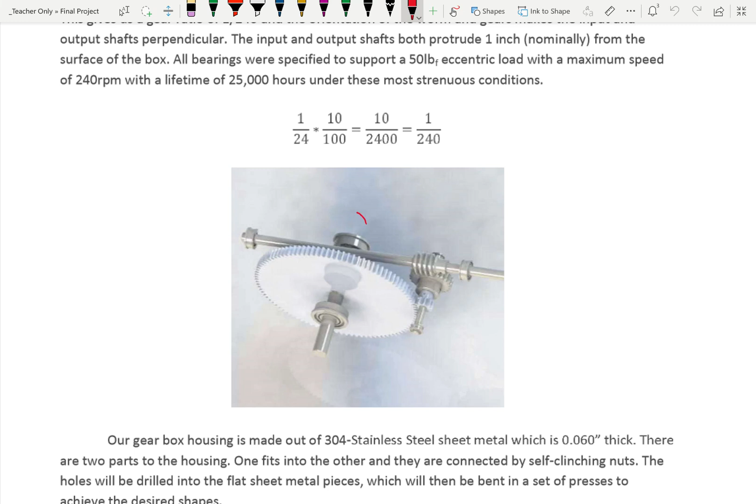To bring fast food in, Alfred State actually brought in Pizza Hut, Taco Bell, basically Kentucky Fried Chicken - that was the fast food joints. People from town would drive on campus to go to the fast food. Did you hear about one of the kids up here, might have been SUNY Canton - one of the 4 colleges up here - they booked plane tickets to New York City to get Chick-fil-A and flew back the same day because it was cheaper than driving. They had enough people, like 6 or 7 people putting in money, so it was like $20 a person for the plane ticket for one person to get it all, then they flew back. Unbelievable - 3 hours.

Okay, so we're going to take a look at this design project that Boston University did, or these 4 students at Boston University did, and we're going to redo it and verify their numbers.

What I'm really interested in that we finish between now and finals week is the shaft that I just circled there, okay? So we got the 1 gear, and we got bearing support, and then we gotta make some choices, because I'm not sure they did, but in this area right here should be probably a retaining ring, and then we gotta figure out the bearing at the other end.

So when we get done, we really got a shaft looking like this, with a bearing here, bearing there, and a gear like so. And then this little shaft out here, it's got its mating pinion, so we'll design that along with this. And that'll give us the gear design bit, the shaft design bit.

We'll be able to pick our tolerances. We can deal with keyways, and we can deal with rings. So it should be a culmination of pretty much everything we've done and make the world a happy place. Make sense? Okay, Laura, you good?

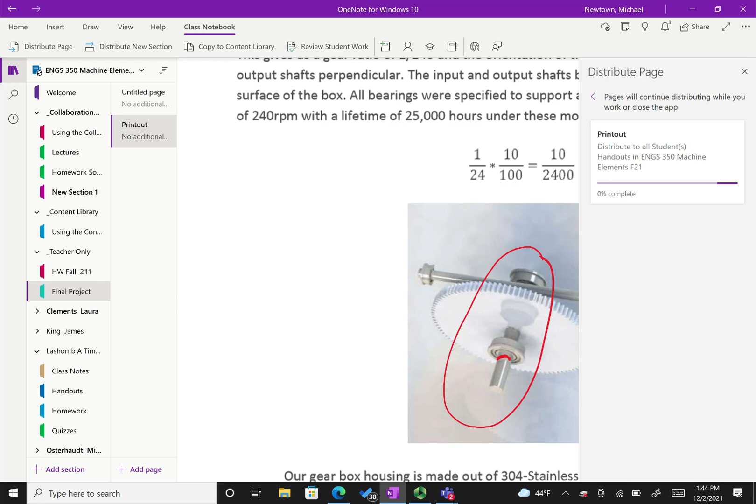Cool. Makes sense? So really it's not any more real teaching, it's more about picking this thing apart and trying to figure out what the sizes are supposed to be, and you guys calculating some numbers to go with it. So let's delve into it.

So our four friends here designed this. We got a gearbox that's required to have a ratio of 1 to 240, a minimum life of 2,500 hours or 25,000 hours. The input and output shafts are orthogonal and a maximum of 1.5 inches past the outer surface of the gearbox. The output shaft and its bearings must support an eccentrically loaded 50 pounds and have a maximum input shaft rotation of 240 RPMs. All right, so we got our RPMs now, right?

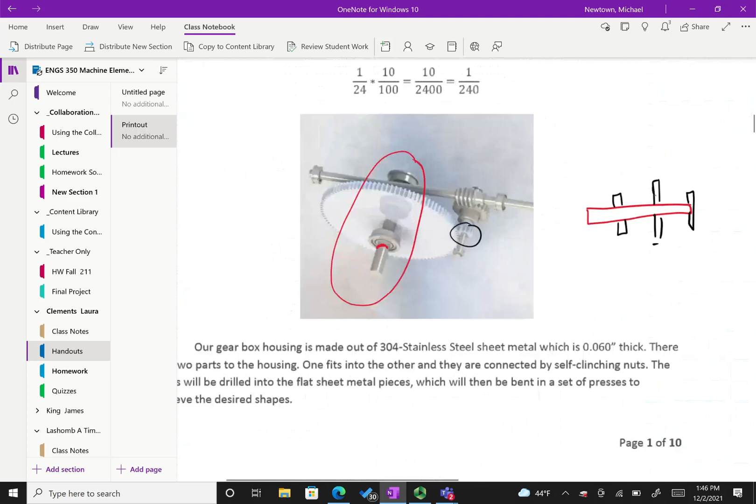Eight-sided? Maybe six-sided. It's hard to tell on the paper picture, and it's not even that much clearer on here. Looks pretty hard to tell if it's orthogonal. I think it is. If you look at the end, it does look like there's a little bit of a right angle, or X or something. It would make sense, because every shaft when it drives has to probably have some teeth, like a drive system so that there's a coupling that slides over, but that's the only thing I can think that means. It sure hell doesn't mean that it's an orthogonal view.

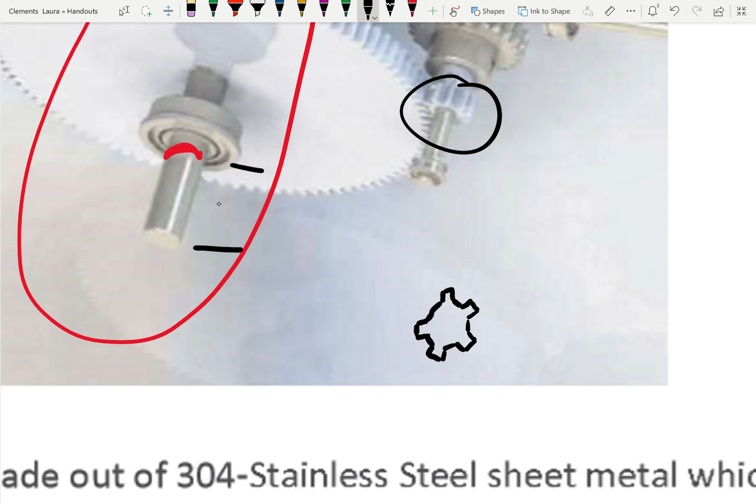And a maximum 1.5 inches past the outer surface. So our bearings out here, from here to here, have a max length there, okay?

Final design of the project includes a 10-tooth spur gear and a 100-tooth spur gear, one worm gear, and one 24-tooth worm gear. We're not going to worry about the worm gear, but we are going to go work on that little pinion gear out there. Gives us a ratio of 1 to 240.

The orientation of the worm gear makes the input and the output shaft perpendicular. The input and output shafts both protrude 1 inch from the surface of the box. So this is the input shaft here, the way I'm reading this. Everybody agree?

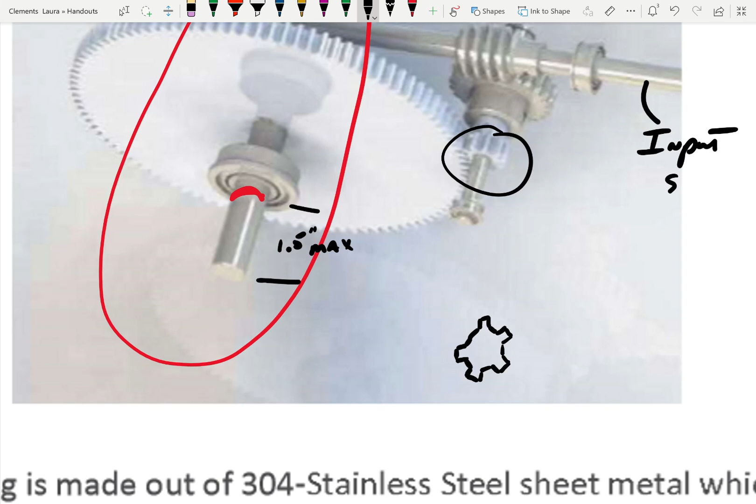Yeah, okay, and that's going to drive down here and then drive this and drive our output. And if I get a chance, I'll talk about shaft couplings so that you can see what those look like.

The input and output shaft, 1 inch, you don't have to worry about that. All bearings are supported, and all bearings are specified to support 50 pounds eccentric loading with a maximum speed of 240 RPMs and a certain lifetime. So we'll actually go look up some bearings too while we're doing this one and choose some things. Our gearbox is made out of 304 stainless steel sheet metal.

Cool. 2 parts, 1 part. We might modify that a little bit to make something a little bit more plausible.

Hey, that reminded me, did Tim log in today? No. Can you ping him, Mike, and see if he's out there on the planet?

All right, so here's the equations they did. We're going to check them with ours. And there's the spreadsheet that they did for the input shafts, so we'll run and check their numbers. Basically, we're going to redo their design as much as possible and check their numbers and make sure it works. Or actually, I should rephrase this: you guys are going to check their numbers, and I'm going to guide you along. All right, so cool.

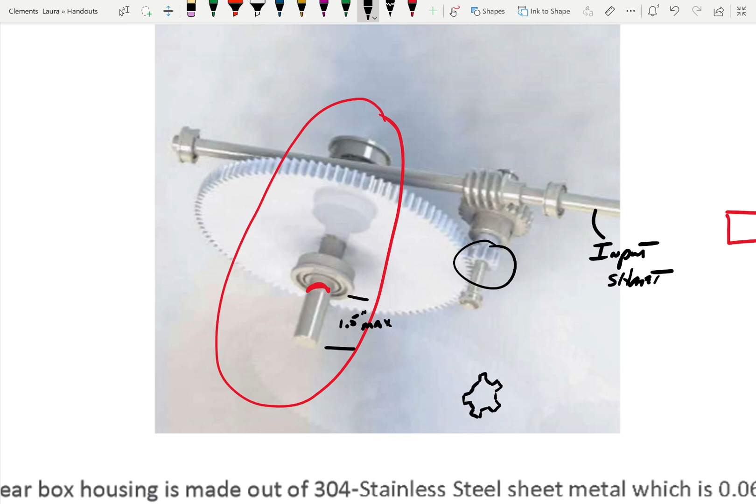So let's ask the $100,000 obvious question out of nowhere. What's the first thing we want to know?

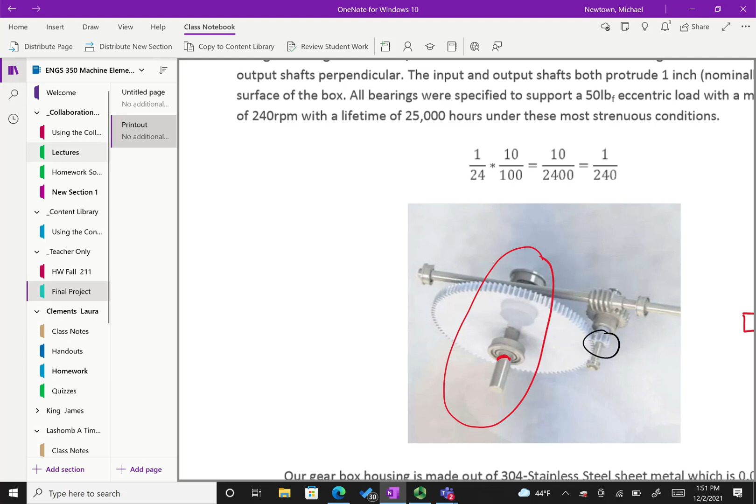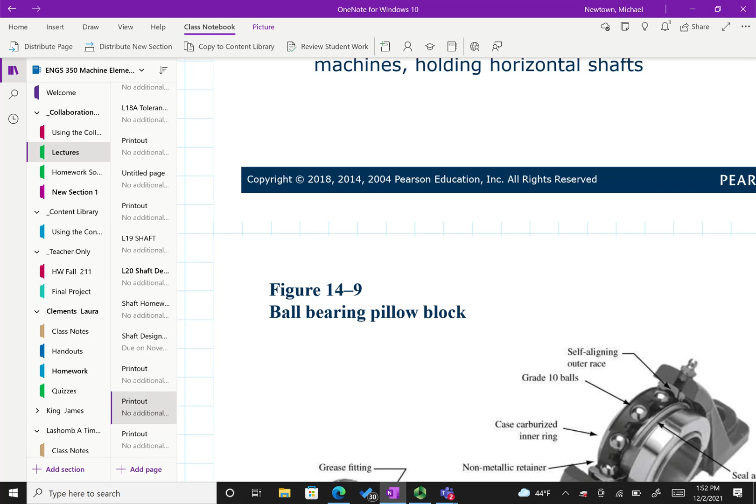Where did I just copy that to? There we go. Okay, so...

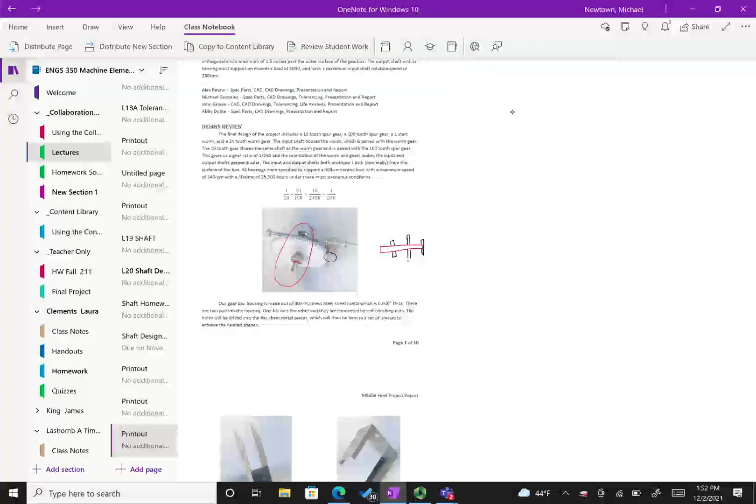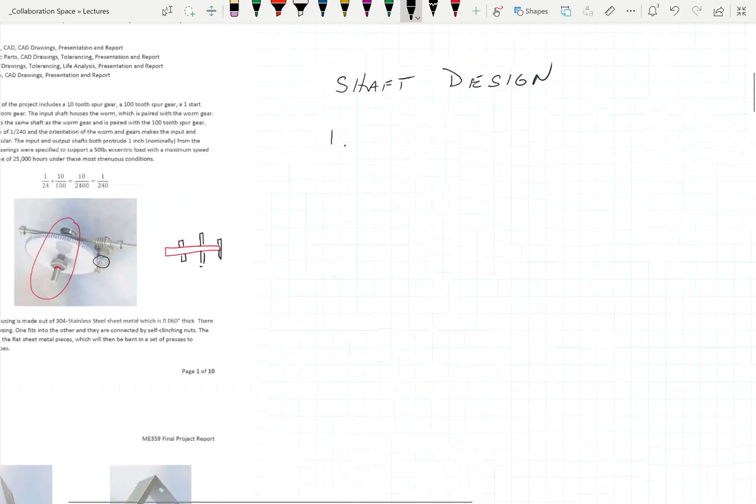What's the first thing we got to do here? He's actually showing up, or is he remote?

First thing I want to do is find their RPMs if they gave that. Okay.

And that was what number? I just read it, didn't I? 240. Yeah, that's pretty cool, so we're actually using a 1 RPM to 240 RPMs. Interesting. Okay, so we got that.

Next piece: find the torque in the system. So in order to find the torque, what do you have to do? Oh, we need the horsepower. Get the horsepower, and the other one. Yeah, go into the horsepower equation.

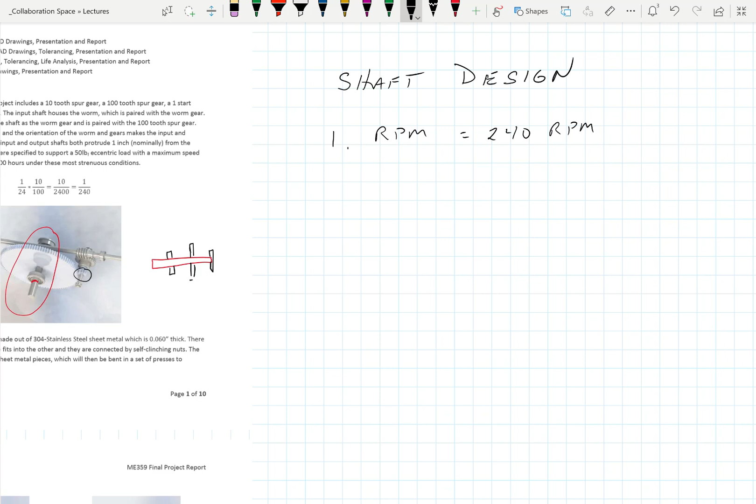So let's introduce another favorite friend of mine here. There's a stapler in there? Oh, alright. I wouldn't bet my life on it, but I'd kind of hope there would be. But if not... yeah, I suppose I'll take it the way it is.

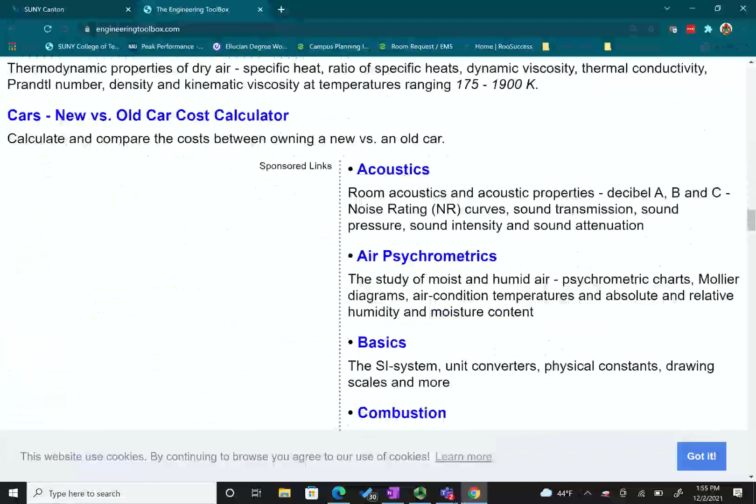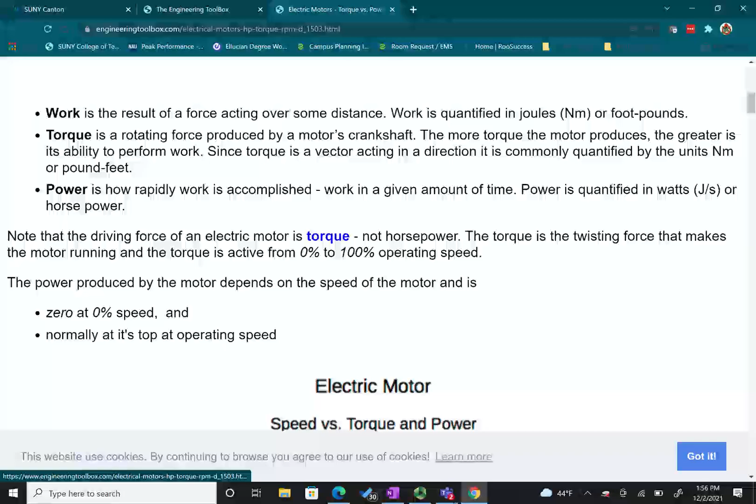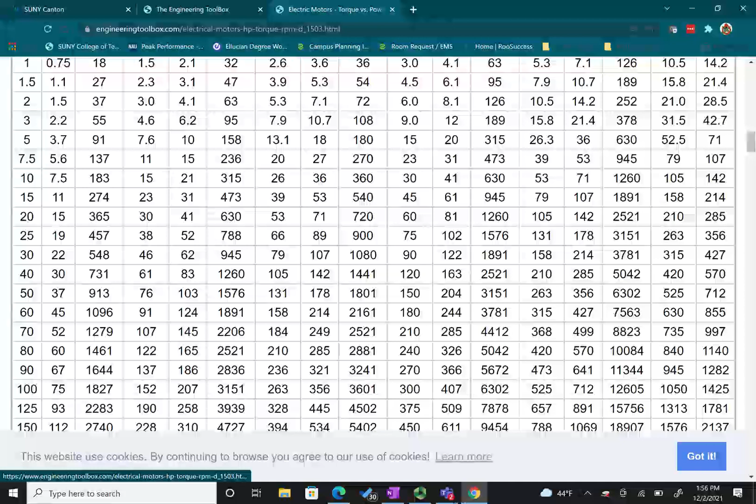Some days these guys have gotten a little too into themselves. They used to be really just simple. But it's kind of there. So they don't have anything at 240 RPM. Extrapolate, I would say yes, or we could cheat and modify this problem any damn way we want. What if we crank it up to 500? Okay. Now, so there's your first modification.

So we're trying to improve this. Is this like their report and we're going to improve it? We're going to take and design a similar thing, yeah. But we need someplace to start. Yeah. Okay, so we're going to use 500 RPM. Go back to our table here. We probably should take a look at probably 10 horsepower. Seems like a good number. Make sense? All right, so we're back over here.

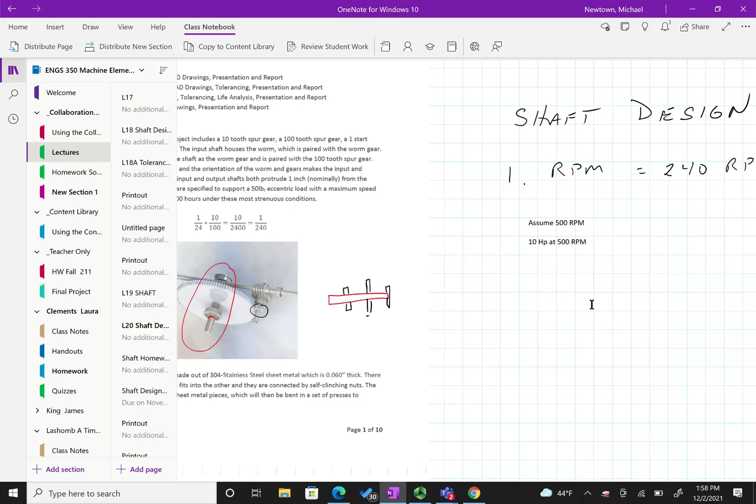Okay. Cool. Now what? Now I found the torque. We'll find the torque. Cool part was what they give us on the table. Yeah, it gave us all that. And if we get the torque, what are we going to know from that?

I've got like 10 things going on. That's what I was just thinking right now. They're talking about that. It's not my brain. He's going to grow up someday and he's going to have all these things all over the place. You should have seen my desk. Like 40. Well, what were we saying? You get like a house or something, it's gonna be pretty scary.

So if we got the torque, what's the next thing we're gonna need when we get to the gears? Their locations. Well, we gotta come up with a location on the shaft where we wanna put it. Yeah. But we're gonna be able to get the force if we can determine what our radius of the gear is, right? We need the force tangential and the force radial. And we need to make some assumptions on our gear. It's easy because the textbook gives us 20-degree pressure angles. So let's use 20 degrees.

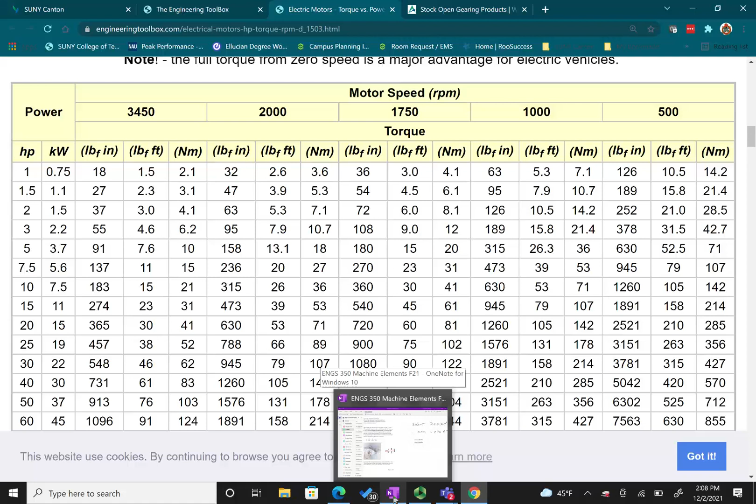Let's try it within, keep it smaller than 12 inches and no smaller than 6. So 12 inches to 6 inches. So I do this. Taking down these numbers, the 500, that 10, what's that? But I guess I'm confused as well, what I'm supposed to do. Well, I'm trying to find gear sizes that would work. The problem is that the bearings can only hold 50 pounds each.

Let's try that way too. That gives you your width of gears you can play with. I don't think we're gonna be able to keep it to 12 inches if we keep the bearings that they've specified. That's okay. Because right now I'm getting, if we max it out at 12 inches, you're at 105 pounds of force. And each bearing can only take 50, if it were perfectly distributed between them.

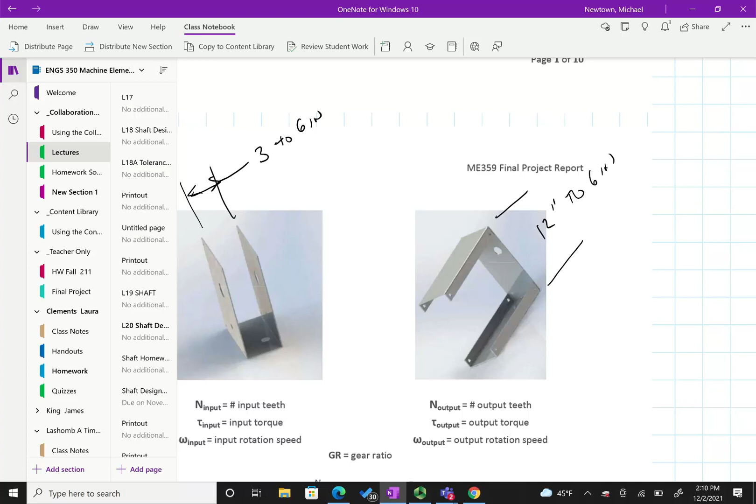So you got a torque here. All right, it was 1260. Yeah. 1260 pound-inches. And you did a 12-inch radius. Yeah, I just maxed it out to give an idea to base things on. But I didn't look up the equations for the tangential forces. Right. So that's okay. I mean, what I'm actually after is not so much that you, well, I want you to calculate the right numbers.

What I'm after is that you understand the nightmare that is design. You know, so this final project is not about the things we already know how to do, hopefully. It's about how do you take those and use them in a design. So I gave you some parameters, 12 inches, no smaller than 6. Okay? If we do 6, what's that do to your forces?

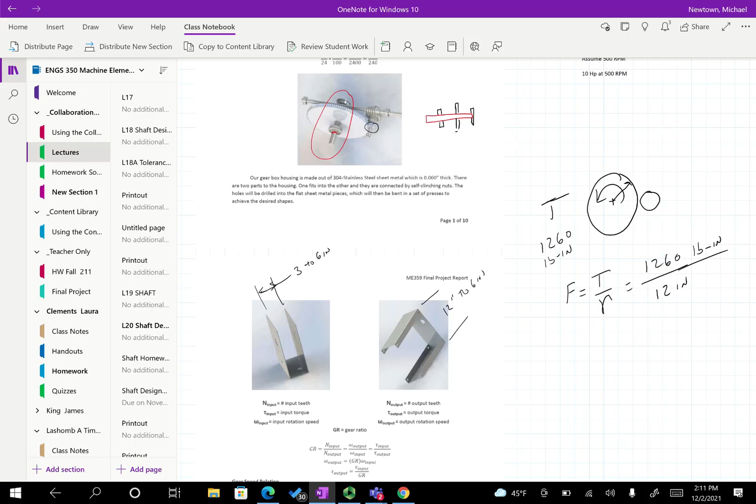But I want you to remember what you're trying to piece together in your head and sort out for yourself is that is your force tangential, that's your force radial, and that's your 20-degree force that's there, okay? But your torque, this force right here, is T. That's tangential. So that's not your radial force. So that's not the force that's actually on the bearing. Okay? Does that make sense?

Now, are you with me here? Able to follow along on all the stuff we did the last couple of weeks? Yeah. Okay. All right, so what can I actually support now if it's 12 inches? And we can always make it bigger. I mean, that's the beauty of design. Our real goal is to get 10 horsepower transmitted from point A to point B. How do we do it? I've just used these guys as a starting point.

If I really had the spare time in my life, I would have sat down and designed this a bit better from scratch. Once upon a time in my lifetime, I actually did that stuff. It was fun, relaxing. Yeah, that's more reasonable.

Your tangential force is 38 pounds. So we're okay there, right? Yeah, in that case you'd probably think about going a little smaller, just because putting it right against the maximum makes things a little tight. So when it comes to actually building, does it really have to be 12 inches? No, it could be, so probably go to 10 or try 10. This is the beauty where a spreadsheet kind of helps.

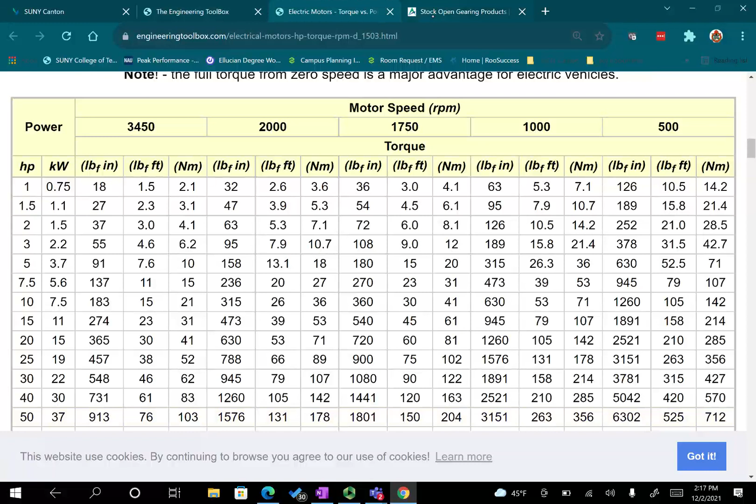So what size do we finally settle on here? Anybody got a number? I'm getting there. I'm honestly thinking about the scope of what we're doing right now. Well, we're trying to pick some numbers and pick some parts and components to actually design the shaft. Are we trying to design the shaft and gears, or the whole version? Well, you're at the point in the design where you've got to get your head around the whole general picture without the details. And that's the tricky part: how do you start?

So kind of what James did here, he started with a 12-inch, right? And then said, well, let's see what that turns out to be. Well, 12-inch, the torque at 1260 divided by 6 inches will give you a number. And we already set our limit that we'd like the case to be 12 inches, so we drop down to 10. Now you got 1260 divided by 5, right? Yeah, 1260 divided by 5 inches gives you another number.

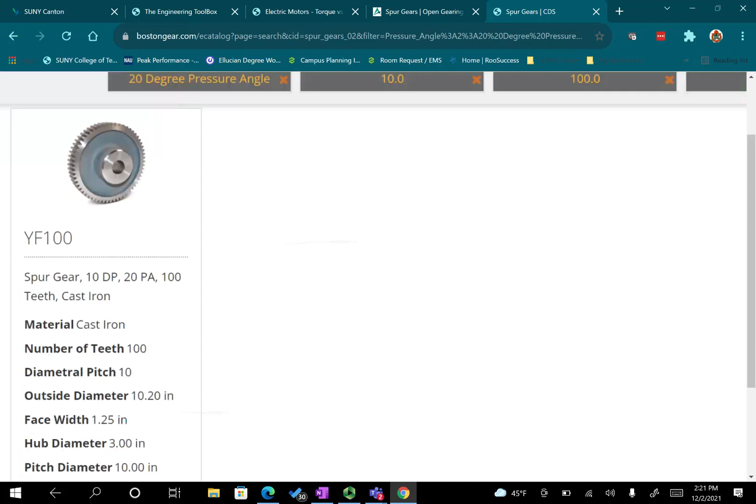Can we get a mating pinion? So the interesting thing is pitch diameter is 10, hub diameter is 3, face is specified 1.25, 'cause that's what's in the design review. Okay, that's what I'm looking at right here too. It specifies 100 teeth on the main gear and 10 on the pinion. Is that in the paper? Yeah. We're checking their stuff, but we're going to change it if we have to. We changed the RPMs and set our own horsepower essentially. So far, those are the changes.

So it's cast iron. Downside to cast iron is... Heavy. Well, it's heavy, yeah, but I'm thinking more about lifespan. So we want 25,000 hours under maximum conditions of those RPMs that we set. And 50 pounds eccentric load. Well, that's what the bearings are specified to support, but it should be able to take 25,000 hours at that.

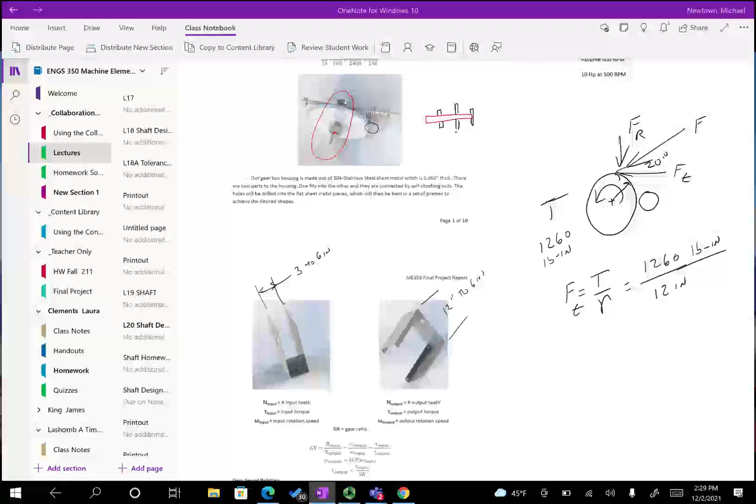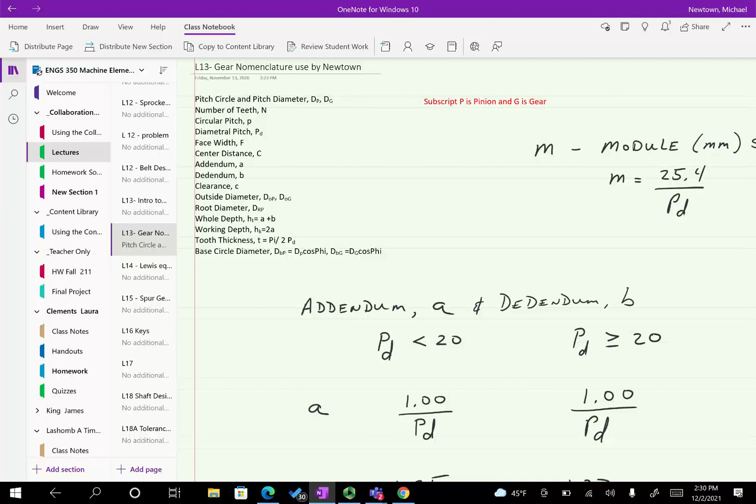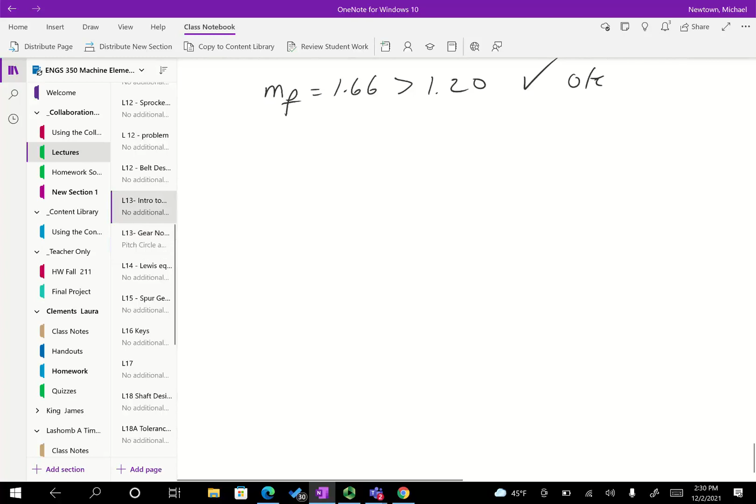Hey, so let me go back and ask this question, back here for a minute. You guys remember what diametral pitch is?

So, number of teeth divided by the gear diameter, pitch diameter. So 10 was our diametral... our pitch diameter. God, I love the way you twist these words around when you do gears. It just drives me nuts. It always did when I was a student, and it still does today. The pitch diameter of 10, and how many teeth?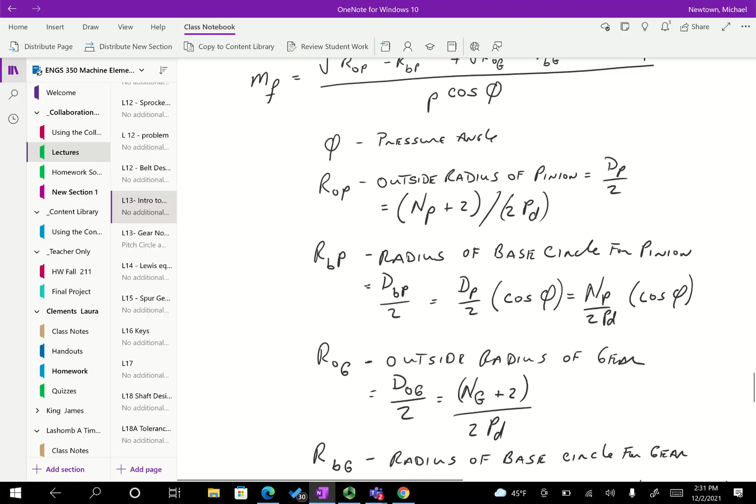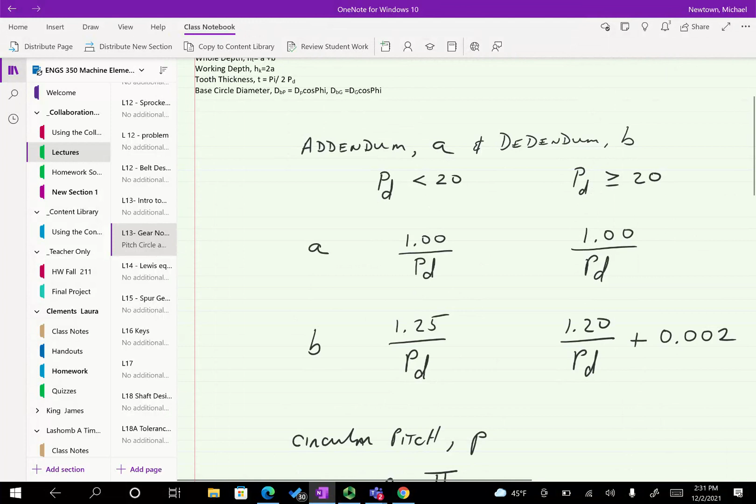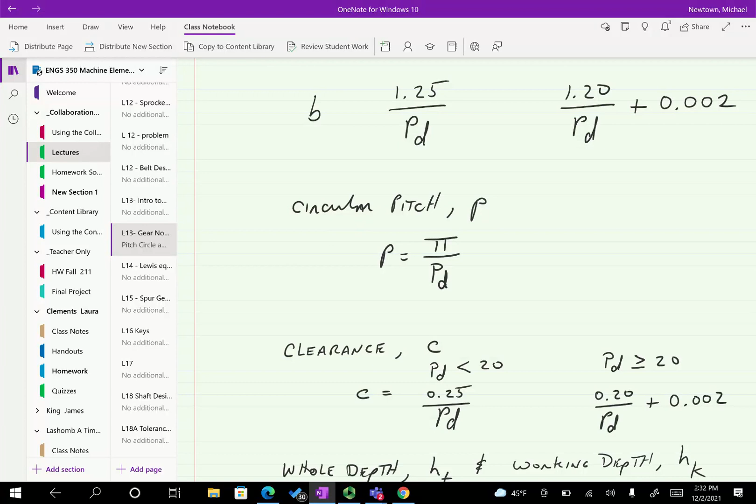Our pitch circle, that's where our points of contact are, tooth to tooth. So that's what that is. So I guess I'm asking that because when we were playing in here, it just dawned on me. So we got 32 DP, so that's our diametral pitch, but that's the number of teeth around the circle. Not the number of teeth, but it's the ratio of the number of teeth around the circle based on the diameter.

Yeah, that makes sense. It's a 2-inch diameter. Right. So I mean, most of those when I saw them, I was like, these are dinky little things. Come on, seriously, what the hell are we looking at? You can't find a very big gear.

You should be able to find a 10-inch circular pitch gear. But they're giving me the specifications. They want pressure angle, diametral pitch, number of teeth, and material. So kind of, we got to get into P and little d to get diametral pitch. So sometimes putting in 100 is too much. So literally, what if we did 10?

Still looks more about our pinion size. Outer diameter is 2.2.

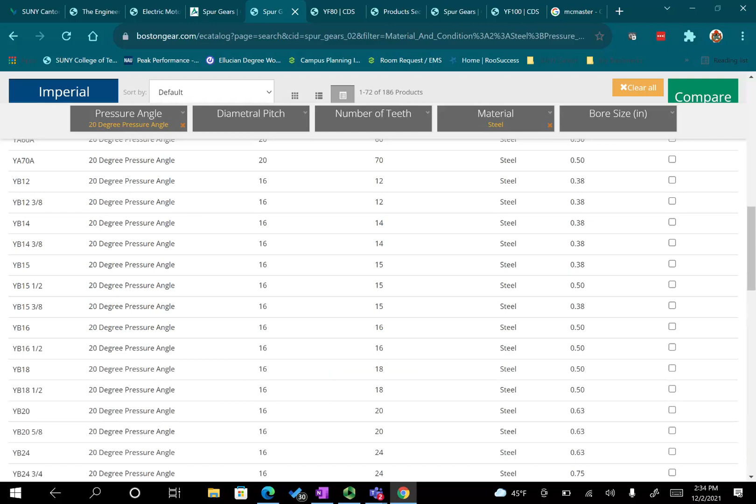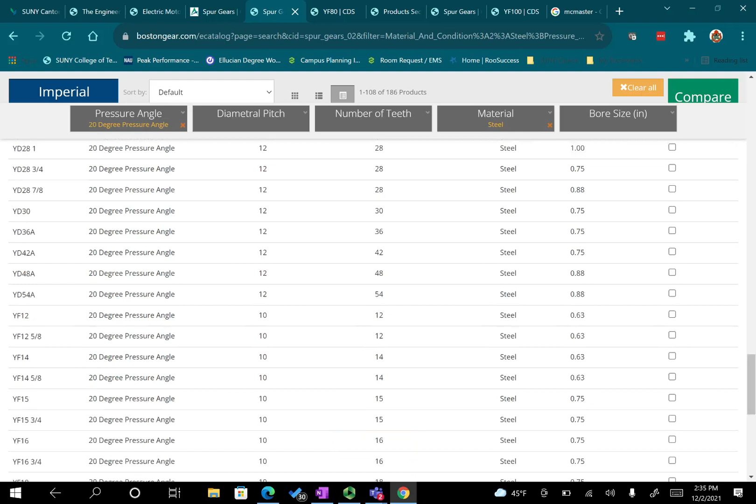Okay, what was the code we got first when it was the cast iron? YF. YF. Yeah, I'll have to look in. YF 100.

Plastic. Or it's a type of plastic. Delrin is a mixture of nylon and... isn't that what cardboard's made of? Yes, nylon and polyethylene or something like that. So it's got a little bit harder surface, but it machines really nicely. We used to use it in the machine shop when Mr. Miller was a lot younger. He'd actually mill the boards to hang all the collets in out of Delrin. Probably chunks of it hanging around here. But since his retirement, no one actually is a machinist anymore, so.

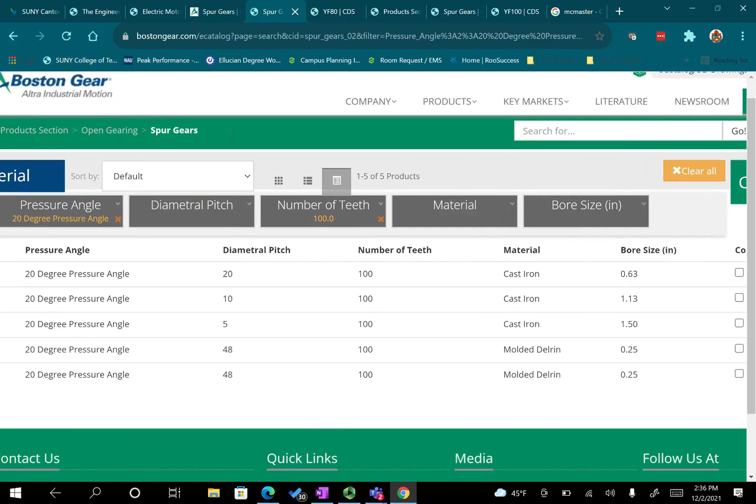Alright, that's not really going to help us unless we change our RPMs. Kind of see where you're running into this headache? Yeah. So, can we change the RPM? Yes, there are changed ones. Well, yes, or we make have them higher, you want to know? To make them... well, they got to stay under 300 if it's cast iron, but then we have issues with the torque being too much force. Right.

But we want to limit the force. Reduce the horsepower. You could, but our goal is to try to reach some horsepower someplace. Right, and granted, I picked this number because you gotta have something, but what can get you to... well, if we change it to 8 horsepower, what's that give us for more torque? Are we using 500 RPM still? Yeah, I think so. Okay. That'll drop us from 1260 to 1008.

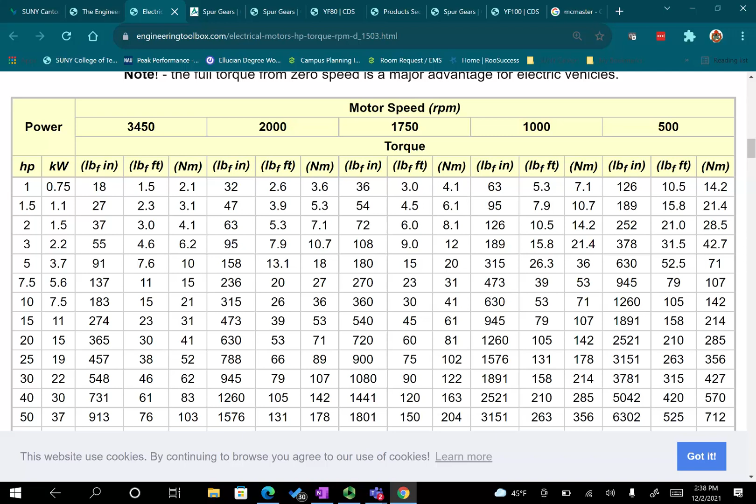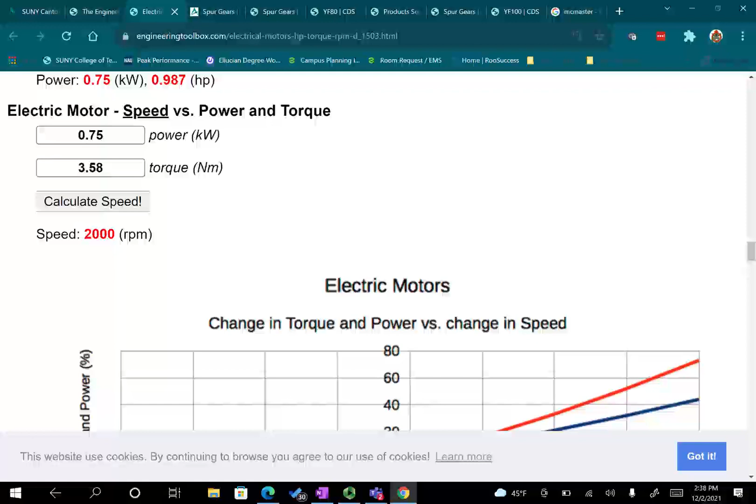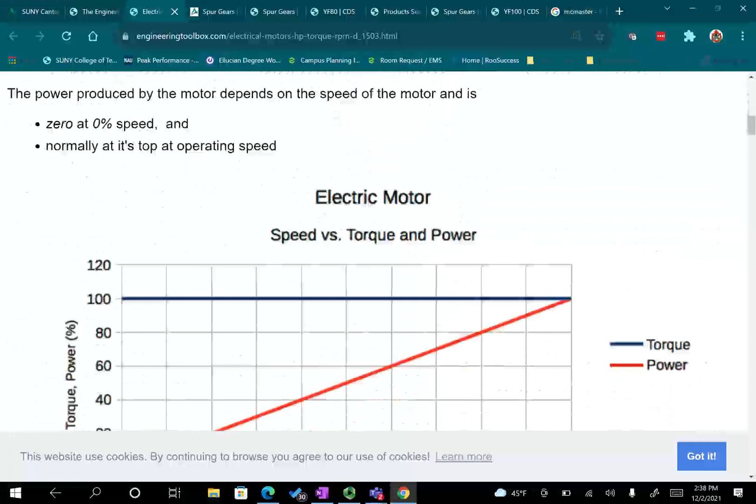So if you had that 10 horsepower motor, we could go from 10 to 8. Well, we might be able to, as long as we are delivering what's required at the other end of the transmission. Could we have like a gear reduction backwards, or not a reduction, increase it? Yeah, yeah, you can actually do that.

So they do that really with linear drive motors that are really low torque, and they put them on a small pinion, drive them to a bigger gear, but then change them back. That stuff happens all the time.

Can't see where we're going here, Matt? There's no definitive answer, there's a lot of guessing at this point. Yeah, no, I get that. I was confused as if we were taking this group's work from 6 years ago and redoing it, or if we were just going through and kind of checking.

Especially when I was looking for some parameters to start with. Yeah, no, find a good place.

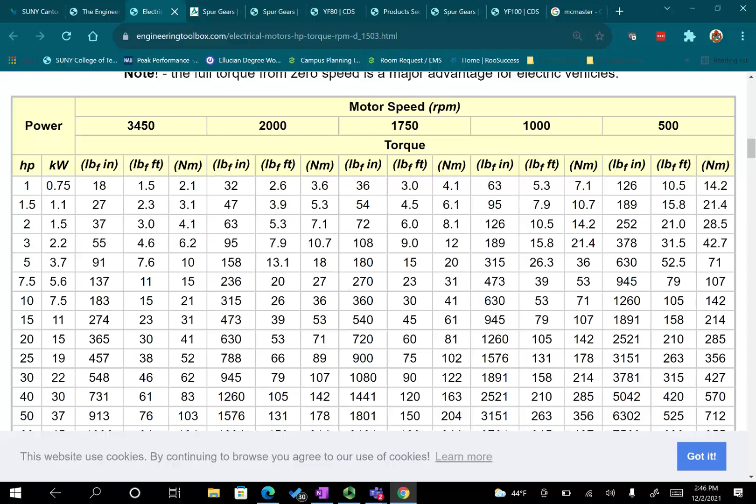But it's still way too high. Yeah, I just saw it. Use the 3 inches, or the 3 horsepower, and the 600. Dude.

I hate clicking on ads, but this may be the easiest way to go. New Boston Gear.

So the torque rating, what happens if the torque rating is really, really high compared to what we need, but the RPMs are too low for the gears? If the torque rating's really, really high, it means you can handle up to that torque. Yeah, and if our actual torque is lower, we're good. But what about the RPMs? What if our RPMs are higher than what the gear says it can take? That's probably going to lead to a failure.